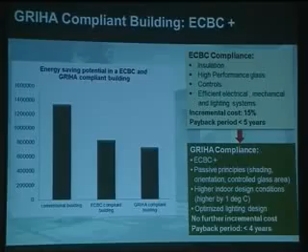I find amongst the audience a lot of architects, engineers, civil engineers and electrical engineers and experts on energy.

I'd like to indicate what we have been doing in the aviation sector on reducing our carbon footprint or becoming more efficient. So it will not be very specific to buildings only. It will be overall what we are doing and how that is impacting the world from an energy point of view, from a carbon footprint point of view.

As you know, aviation as a transport service is one of the big polluters. We release 2% of the CO2 emission, but the bad part is this is released at the topmost layer of the environment, so that is doing almost 10% damage to the environment.

So that is very much detrimental for overall health in the environment, and we have been aiming to reduce this carbon emission on the planet.

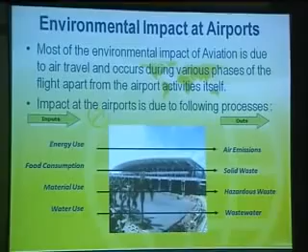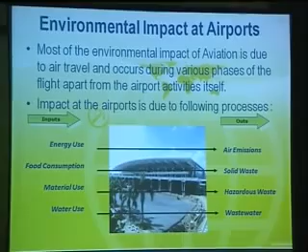We have this total emission where aviation is involved or responsible for it. A major portion is where we all travel, and then it is at the airports when the terminal buildings are there and where the aircrafts and all the vehicles are moving. So we are trying to control all these types of emissions and energy footprint at all these points, so that collectively the overall carbon footprint is reduced and energy consumption is controlled.

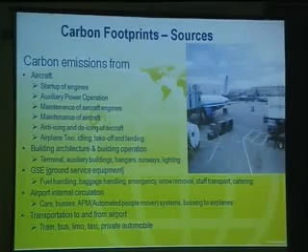Carbon footprint from aircrafts, as you know, is standard: the engines, auxiliary power operations, taxiing while the aircraft is taxiing or taking off and landing, and from buildings in general, terminal buildings, hangars, runways, whatever buildings we are having, lighting, and ground equipment which are working at the airport. These are all responsible, and all other multimodal connections like cars, buses, trams, these are all responsible for energy consumption at the airport.

We are also impacting a lot of environment, which is we are responsible for air quality, water quality in the vicinity, and a lot of solid waste is generated at the airport and hazardous material is generated at the airport. These are all to be dealt with and handled so that we live in a cleaner environment near the airport.

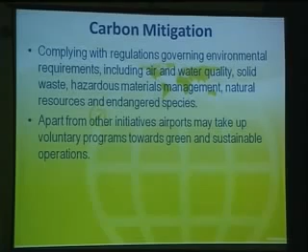In order to reduce the carbon footprint while the aircraft is on the move at the airport, we have better taxiway planning and more number of gates, so that less and less fuel is burned while the aircraft is taxiing.

We also plan all the other connections like hangars where the aircraft is parked in the night, and multimodal transport also is responsible. Suppose you park somewhere at a long distance and then other transport is taken, so that also results into a lot of energy waste. So that is how we plan in such a way that minimum travel time is involved, so least energy waste occurs at the airport.

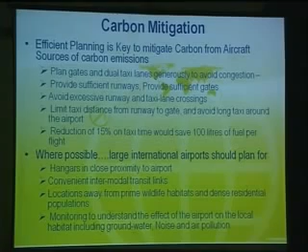So what are the areas where we can have an opportunity for large scale energy conservation? We have a very large roof area at the airports, so as it was shown, it can be used - we can have solar photovoltaic cells at all these roofs, have energy saving there.

We can have natural light at the airport, avoiding artificial lighting. We use large scale glass surfaces to give a good ambience. So the type of glass, double layer glass or highly efficient glasses, are to be used.

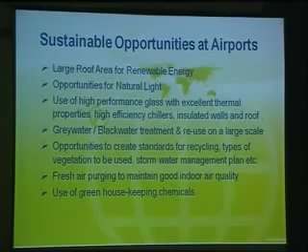And the water generated, whatever water we are using, we are again treating it and reusing it. So like this, we are trying to conserve the water, conserve the energy.

These are the broader areas where all this can be used in block form. We use solar energy, that is all we are using. We are also using geothermal energy for doing the cooling in certain situations. We have a lot of IT applications which result in lower energy footprint, like better fleet management and better resource management, if it is done.

We have better handling equipment, handling machines, that is baggage and cargo machines. If these are much more efficient, we have a lesser footprint. Another great thing is that we have better air navigational facilities at the airport. These are technologies which the general public is not very much conversant with, but they'll be happy to know these technologies.

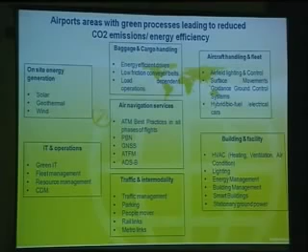These technologies do result in a lot of energy reduction while the aircraft is in flight. Building-wise, of course, you are familiar with how the building's energy footprint can be controlled by controlling HVAC, lighting, better energy management, and building management systems. All these are being used at the airport to have a lower energy footprint.

We in Airport Authority have also gone through various stages of going for a green building, a green terminal building. One of the stages is at the design stage itself, where we go through the screening process so that various elements are controlled, so that it becomes an energy efficient building.

And we have been trying to go for GRIHA rating for these airports. Various airports have been selected, and we have an international body, which is Airports Council International. They also do the carbon accreditation program.

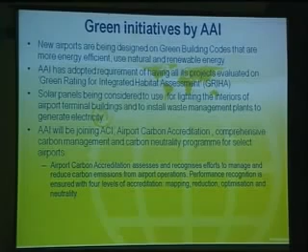So selected airports are chosen, and these are analyzed. First the problem areas are analyzed, and then we control their energy footprint. Then there is an accreditation program for that - level 1, level 2, level 3 type programs are there. Through that, we control a lot of energy footprint for the airports.

Whatever site we are selecting, we have to see from various points of view that we conserve the topsoil, because while we are making a runway, we may have to cut a lot of runway and do a lot of earth movement. So we see that the topsoil is rightly preserved, and erosion doesn't occur while we do the construction. We also address the noise and water waste issues for the airport.

Once we plan an airport, at any greenfield airport, this is also a big issue - trees all around the area are a problem for us. So we have to cut the trees which are not wanted, and again plant trees where these can be allowed. So a lot of area planning has to be done to control the environment all around the airport.

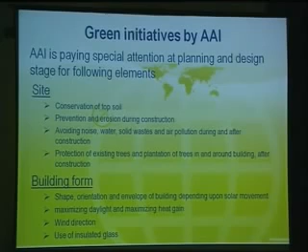Then the building form - sometimes we have limitation of the building because of its runway orientation, and still we control a lot of the shape of the building, maximizing the ingress of daylight and minimizing the air conditioning load in the building, because everybody looks forward to the best facilities at any airport, and naturally these facilities come with higher energy consumption at the airport. So we have to do the right balance so that energy is least used at those airports.

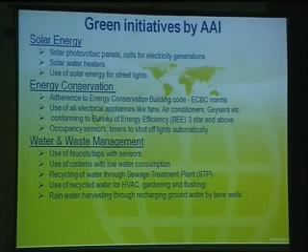Of late, airport authorities have started using solar energy at various airports. We are going for a new type of contract where we enter into a contract with that particular agency for...